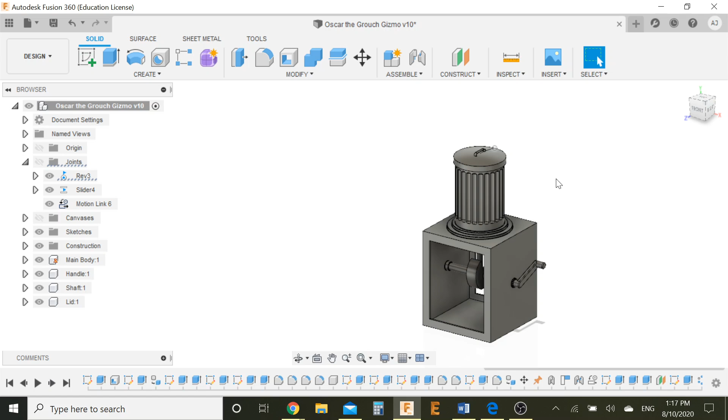First let's get started. Let's just apply a joint first. Now, if we remember from the joint video, what I said was if you have all your components in place, the best thing to do is to put an as-built joint. So let's go and put an as-built joint. And what I want to do is I want to select this component and this component. And make sure your joint type is Revolute. I haven't already selected that.

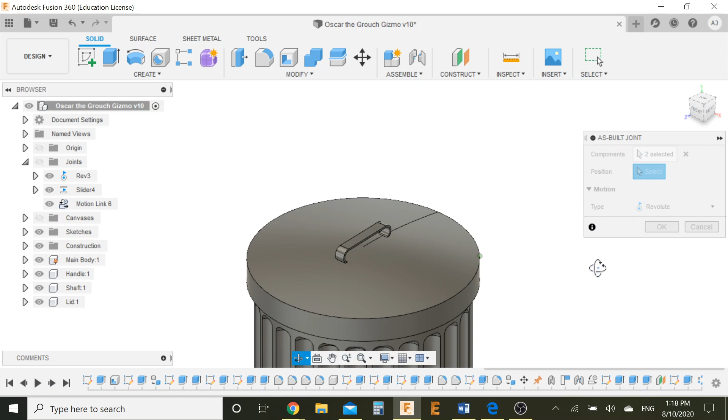For my position, well, first I want to go to a front view, right? So that's how it's going to look. And that's going to open like that. I'm just going to move a little up. So if I rotate around here, where this line is, that's where I need to put my joint. So I'm just going to hover over this point, right? Let's see where it puts the joint.

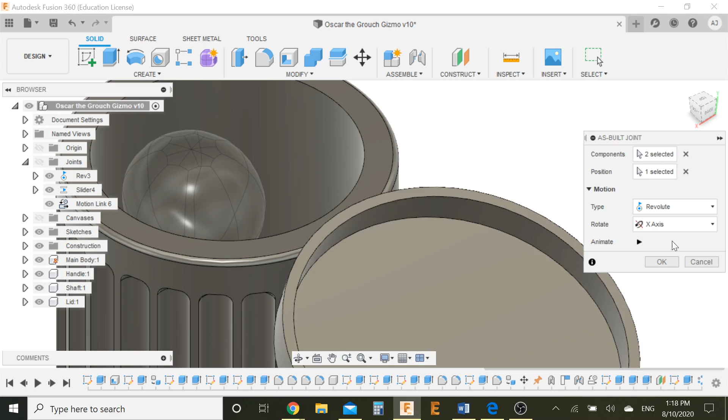It puts it there. So if I click on that, it's moving it in that direction. We don't want it in the Z direction. Let's try the X-axis. Perfect. The X-axis is exactly what we're going for. So let's press OK. And let it give us a second to load. There it is. So now I could grab this and I can move it 360 degrees around.

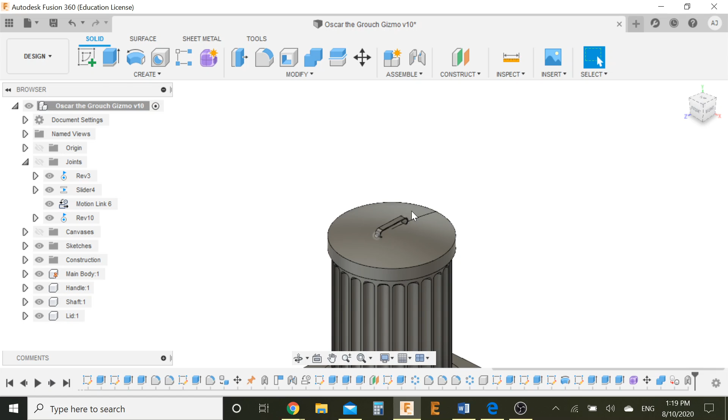Now, we don't want it to move 360 degrees. And if you remember from last time, we put some joint limits in. Feel free to put the joint limits in. But for this one here, I'm not going to put any joint limits. I'm directly going to constrain it using the motion link. So now let's create a motion link between that joint and that joint.

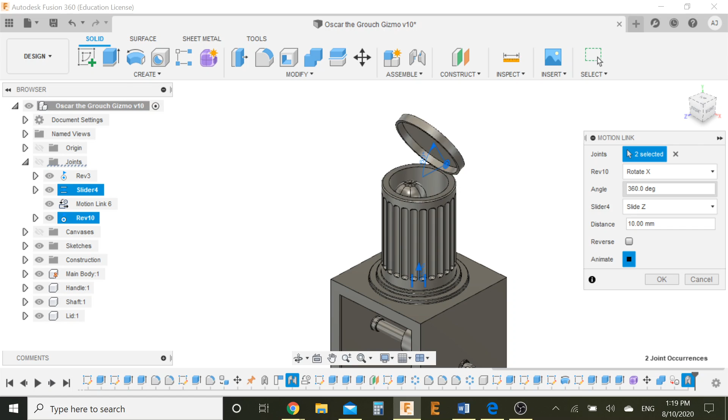And I feel, in my experience, the best way to select joints is by going to the browser and selecting them under the joints bar. So I'm going to select this one, and I'm going to select the slider. Now, as you can see, it said that every 10 millimeters that it moves up, this is going to move 360 degrees. We know that's unrealistic. Let's bring that down to, say, I don't know, 30. It's moving downwards. We don't want this to happen, so let's reverse the motion a little bit.

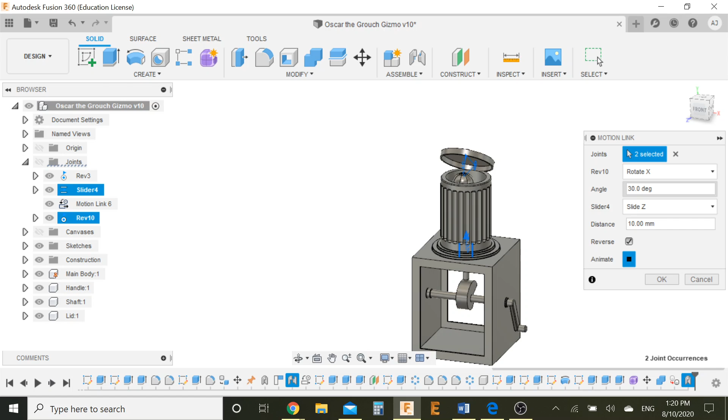So if you can look at this now, what you see is when this moves up, that moves up, and when that goes down, that goes down. That's exactly what we need. So now all we need to do is mess with the angle and get the angle right. So 30 degrees is looking like a lot. Let's try 15. It's looking slightly better.

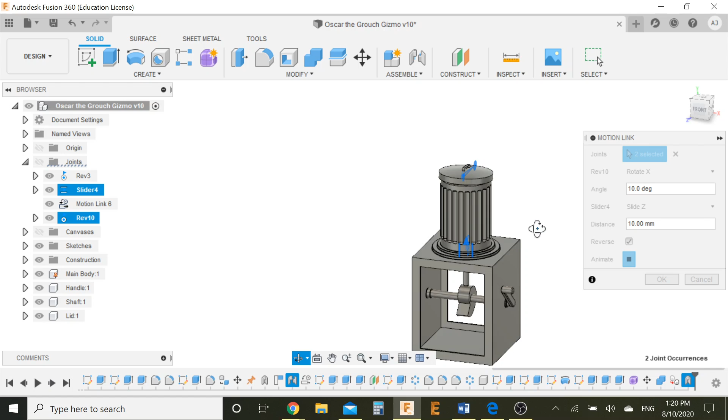I know there is a gap between them that we could technically fix, but it's not too relevant now, so I'm going to ignore it for now. 15 also seems a little big because the gap is a little too high. Let's try 10. Perfect. I think that's looking great because now when we apply the decals, you only get the eyes when it's looking out, and it opens just a little bit, so it actually feels like he's peeping out. That's perfect. I like that a lot.

So I'm going to press OK. And now we've successfully put in a motion link between them. So technically now, if I rotate this handle like so, perfect, it moves. So now I have this shaft moving. I have the handle moving because I'm moving it, but I also have this lid opening along with that shaft, which is exactly what I need.

You could also, just for practice, try creating a motion link. Like, get rid of this motion link that we just created and create one linking the joint over here to the joint of this handle, and see what you can do from there. That might be a little more complicated, but it'll give you a good understanding of motion.

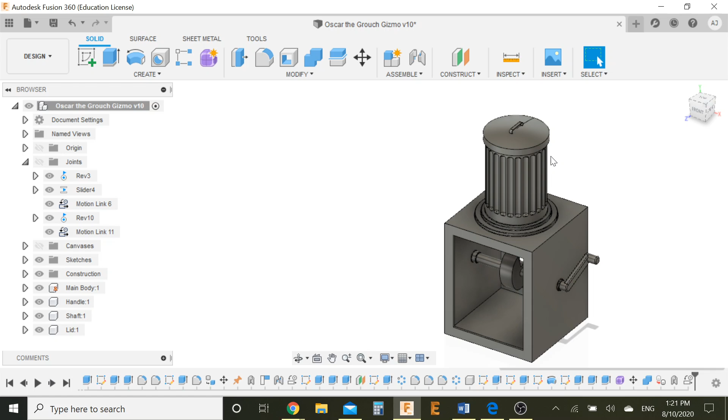That's it for this video because that's our main focus. Next video we'll be applying a decal and maybe some appearances. But besides that, I think this is it for this series. So next video will be the concluding video.